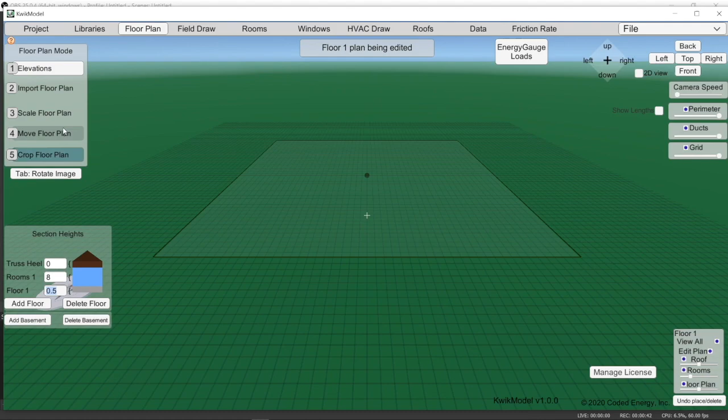So we go to floor plan mode here. The next thing we need to do is then import the floor plan. This one, top view, and then 2D, and then it looks like we need to rotate that. So let's see here. Tab rotates the plans. There we go. Okay, and so you see this is 58 feet across the back here.

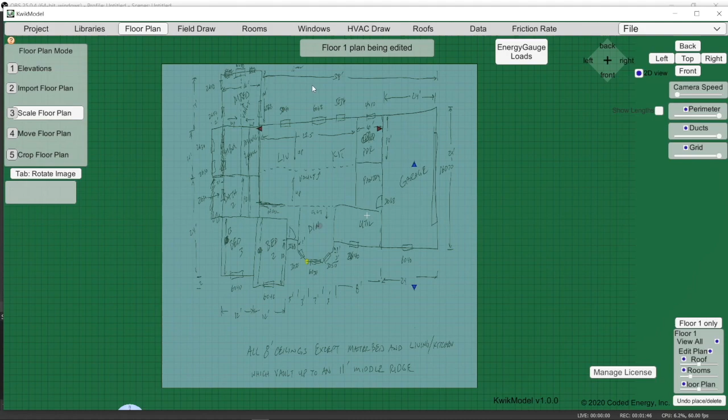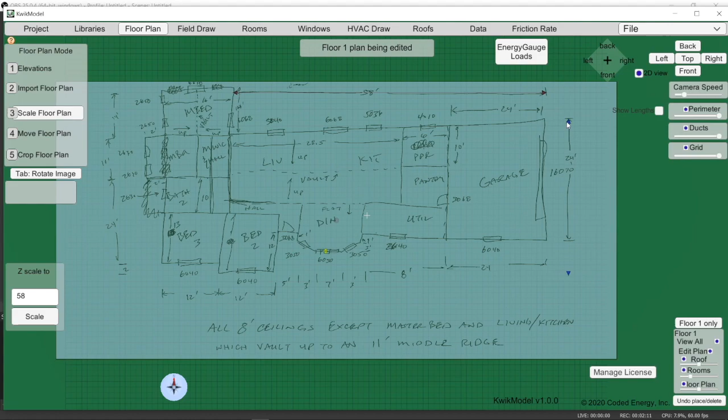So the bigger the distance, the better. But because this drawing is so out of scale, it's not super important, but you want to get it close. So we're just going to say that distance there is 58. We come down here and hit 58, enter, and then we want to do a vertical one. So grab your little blue arrows here, and here's a 24 feet over there, and call that 24. So I'm going to change this just a little bit, and maybe a little bit more. There we go. That looks a little better. Okay, so it'll be close enough.

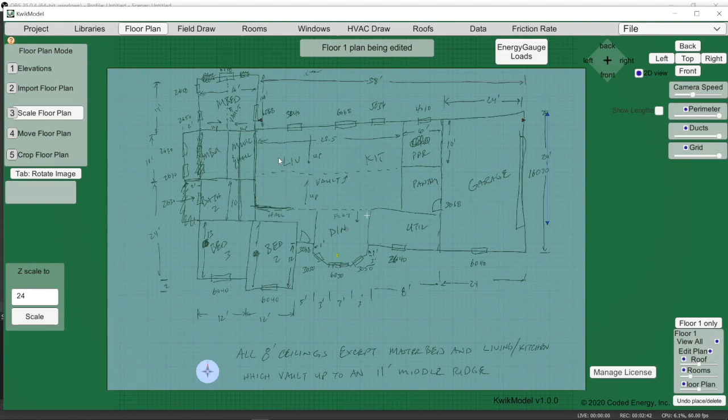Alright, so now we're going to go to Field Draw mode, and what you do in Field Draw is you basically identify the corners, and it will connect those corners with walls. So I usually start in the lower left hand corner of the house, and I hold down the Alt-Shift key and I click, and it puts a little dot there. Okay, now I'm going to go to the next corner, whether it's an interior corner like this one or an exterior corner like this one, and then I'm just going to walk around the house.

Okay, so here we go, Alt-Shift, and it draws everything square, so you need to compensate a little bit for that. Click, click. I'm just walking around. So this wall is really out of square, so I'm going to click over here and kind of square it up a little bit, and then I'm going to come down here, knowing that I have to come across to this corner. There's a little 1-foot wall there, and then a 45-degree wall, and then a straight wall, another 45-degree wall.

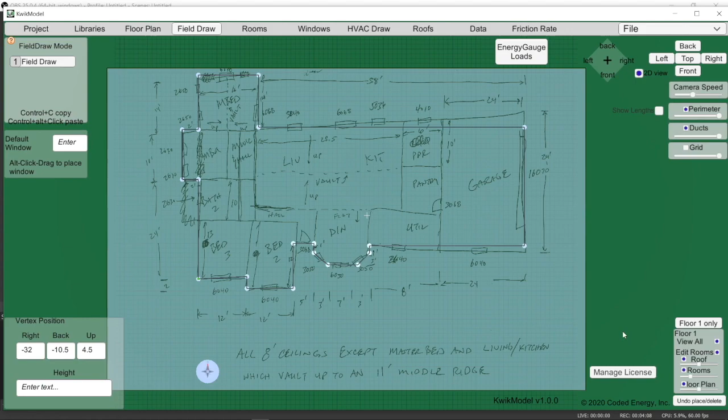And if it is not where you want it, you can just click on it and drag it over to where it needs to be, and then go back to Alt-Shift and just continue on around the house, and there we go. If I were to turn off the floor plan here, you can see that it created this perimeter.

Now what that's going to do is act like a cookie cutter, and it's going to constrain the rooms that we're going to place inside there.

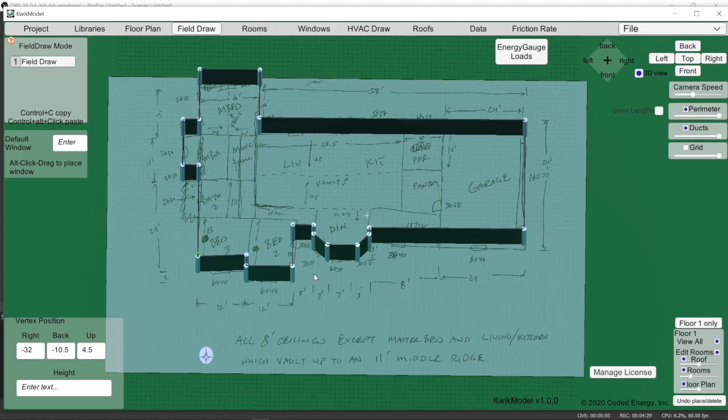But the first thing we need to do is get it to scale. We followed the drawing, and we know the drawing is not to scale, so we need to get it to scale. What we're going to do is use these dimensions on here. So this is 12, 12.

We got 24 across the back here, so we're going to go ahead and enter those lengths on these walls. If I click on this wall, and you have to be a little precise when you click on it, you'll see the way I've drawn it, it's actually 21 feet down here in the lower left, and I need to make that 24.

So I can go 24, enter. Now what it does is it shifts everything after. This was the point I started on. I should mention that too.

Whatever point you start on, the first wall you draw, that's the one you want to enter the length first, because it's going to adjust and move everything after that point based on the dimensions you enter. So everything afterward is going to adjust as you walk around the house and start putting this stuff in.

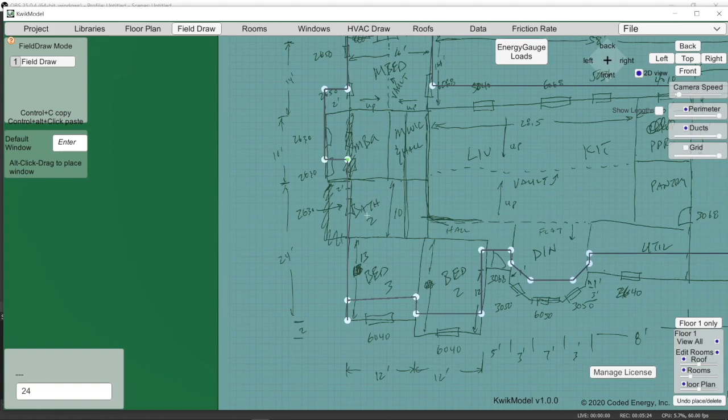Okay, and if you want, you can lighten the room a little bit so you can see the dots a little better. So from here to here is our first point, and it's 24, and now it's to scale. It's 24 feet wide.

So this distance here is 2 feet. Let's click on that, and the way it was drawn was 3.5, so that was a little long.

So now it's 2. And then this one here - by the way, if your scale drawing starts to deviate from your plans by too much, you can go back to floor plan and click on move floor plan, and you can readjust things to help you out.

So I see here that this looks like 10, but it's actually 11. Okay, so I click on here. Oh, I got to go back to field draw. Click on this one, and it was drawn at 10.5. It needs to be 11. Enter. Now it's good. This distance is 2.

Enter. There we go. This wall here is 14. There we go. And we've left our drawing just a little bit, so I'll bring it back just to make it a little closer.

This distance is 16. There we go. And this one is 14. Okay.

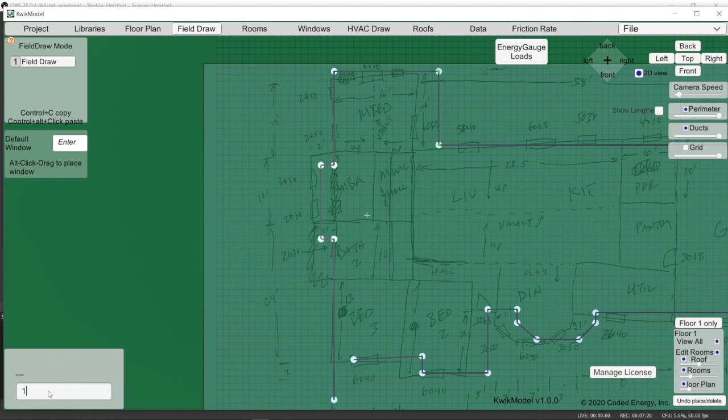Alright, let's adjust our floor plan a little bit here, get it back down. So now this was our 58. This long wall across the back was 58. So I'm going to click on that. And oh, we were close, 57.5, so 58. Enter.

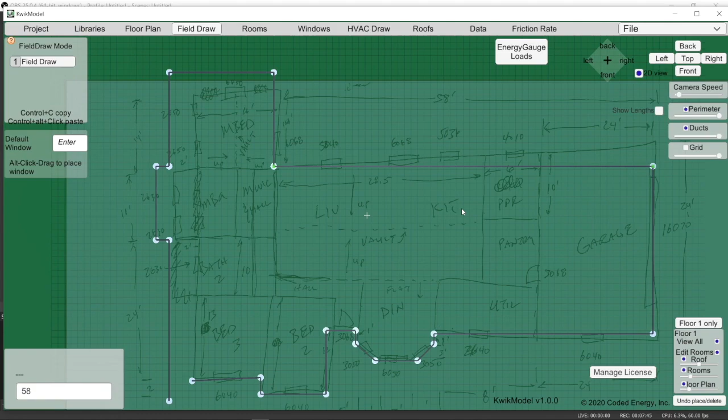Well, that was the one we scaled. That's why it was accurate, because we scaled based on that. 24 down here. Okay, 24. The garage is 24 and this utility room, but this wall here is going to be the sum of those two, so 32.

Okay, let's adjust our floor plan here. Now we got this tricky little bay window here. So this one is 1 foot.

These little bay windows, the best way to draw these is with your perpendicular distances. So you've got 3 foot this way and 3 foot this way, and you can sort of manually do that. I know if that corner's there, and I go 1, 2, 3 here, and then go over 3, 1, 2,

3, then that's a nice 45-degree angle there. Let's line this one up too, make everything nice and square. So this wall is 7.

Okay, and then we have the same thing here for the 3 foot by 3 foot. So if we go 1, 2, 3, that's good. 1, 2, 3, that looks pretty good. Okay, that one's 1 foot.

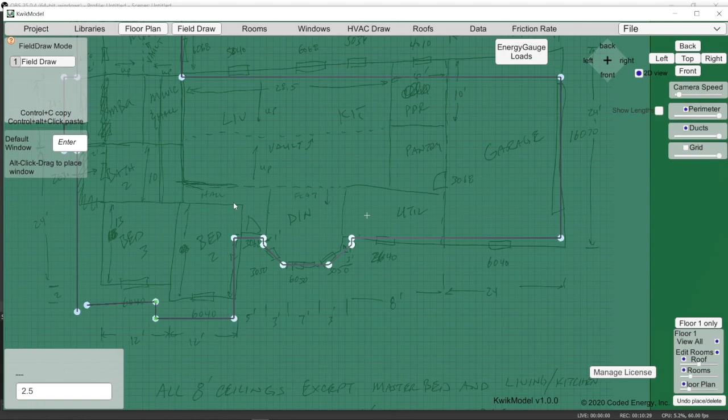This one is 12. This one is 2. That's this guy here. Let me scooch this over. So that's just 2 feet here.

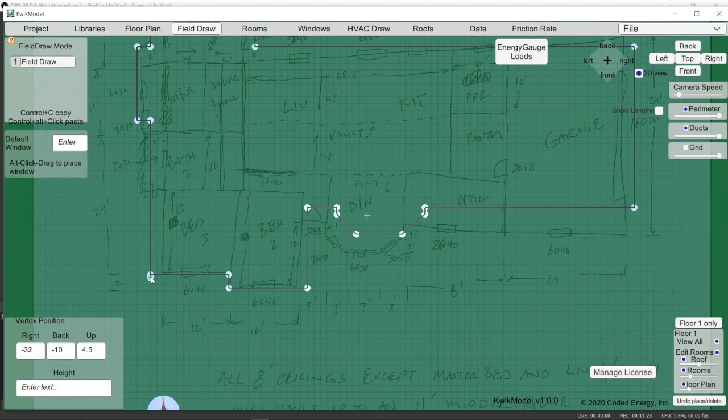Two, and then this one is 12, let's square it up a little bit this way. So 12. Now, if the dimensions were perfect, and we suspected they were not, this dot and this dot would land right back on each other. But considering all the dimensions around the house, they're only off by about a foot, so that's actually pretty good. So I'm just going to true it up by grabbing this one and putting it right on top of that other one, and there we go.

That's our true scaled perimeter of the house on top of a not horrible but not great hand sketched floor plan. Let me turn off the floor plan so you can see it a little better. If I go into 3D mode, you can see that's the perimeter of the house, and that's all to scale based on the dimensions they drew.

Okay, now the next thing we have to do is draw the rooms. The way you do the rooms, what this field draw does is draw this perimeter, and this over here turns it on and off. This perimeter constrains the room, so you can plop the rooms down inside of it, and they bump up against this wall, giving you a nice template to keep everything inside of.

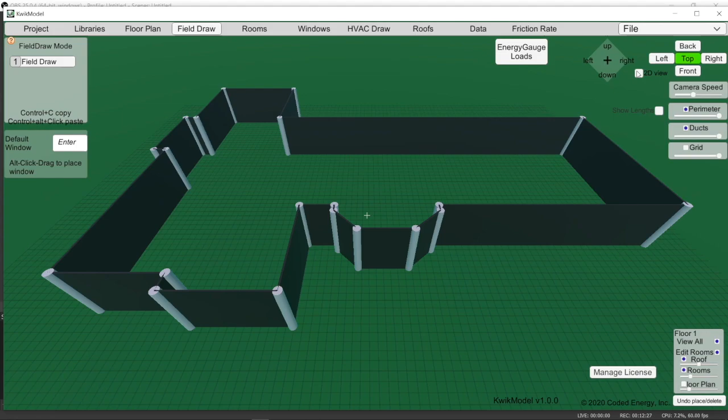So let's go back to top view and 2D mode, and the next thing we're going to do is go into room mode, and we're just going to alt-click to place a room. You can drag it and you'll see how it collides with that perimeter we placed there. It just bumps up against it, you can't go past it, and that makes things go a lot faster.

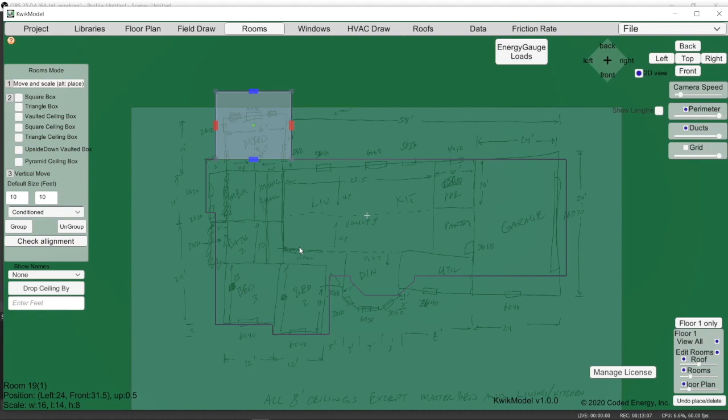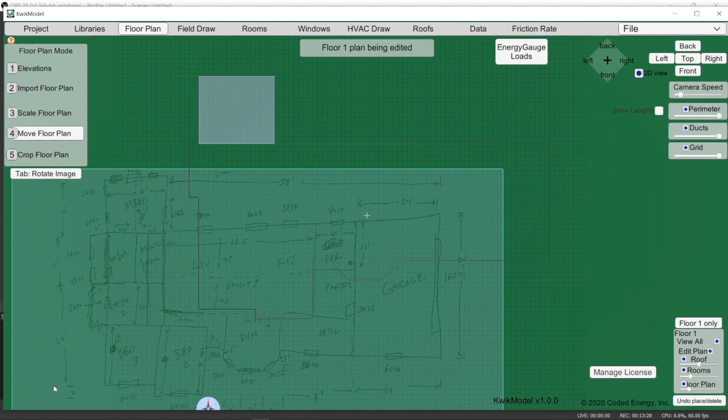So just drag it to the width this way, and let's turn our floor plan back on. Down here, floor plan. So you can see we're in the master bedroom, and the master bedroom is basically a square rectangle. The master bath is in this little bump out area here. If you want, you can move the floor plan off to the side where you can see it and do your rooms, or try to put them up on top. You can also lighten the rooms with this little slide bar here so they're not quite so dark, you can see through them. It changes the opacity.

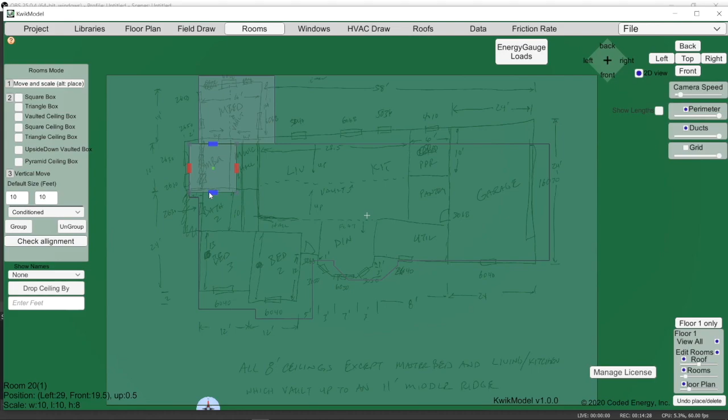Let's go to room mode, drop down another room, slide it in there, and it looks like I actually did - I said it was 10, and I think I may have typed in 11, because I noticed the default room size is 10 by 10, and when I put it in there it says 10 by 10 by 8. It's a little bigger, so I think I messed up on that, but it's easy to fix.

Just go back to field draw, click on that little corner. If you look real close, you can see a little green dot shows that it's highlighted. I'm just going to move it over, and then move this one over, and there we go, we're back in business. Go back to rooms, and we'll just put that master bath there, and then over here is the walk-in closet.

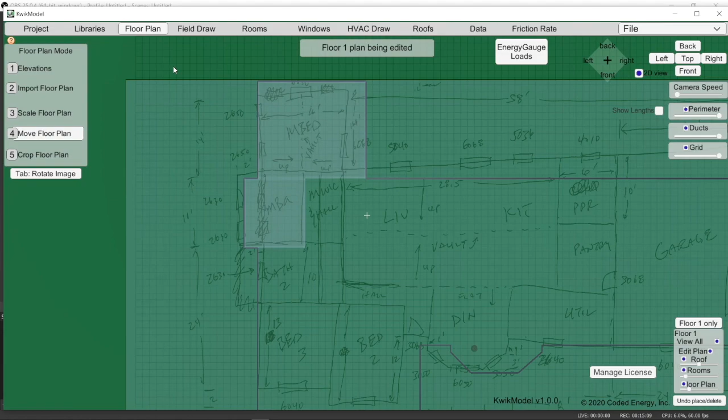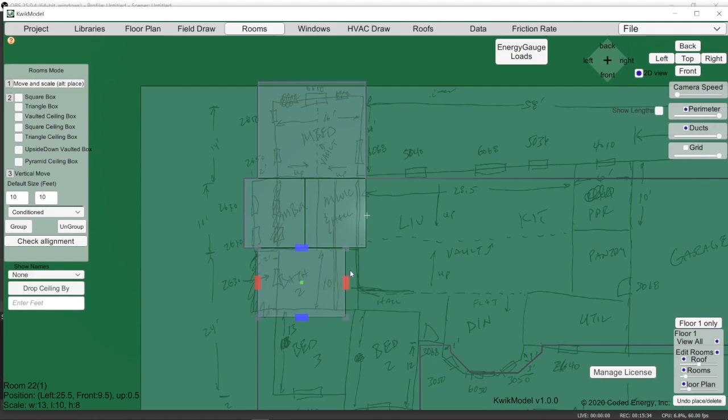Let's adjust the floor plan a little bit here, like so. Put a room here. Here's our bath. Okay, I'm looking at the line of our perimeter there, so it bumps up against there, and looks like the bath also includes the hallway. Okay, here's bed 3 down here. I'll line it up like so, so that's lined up there.

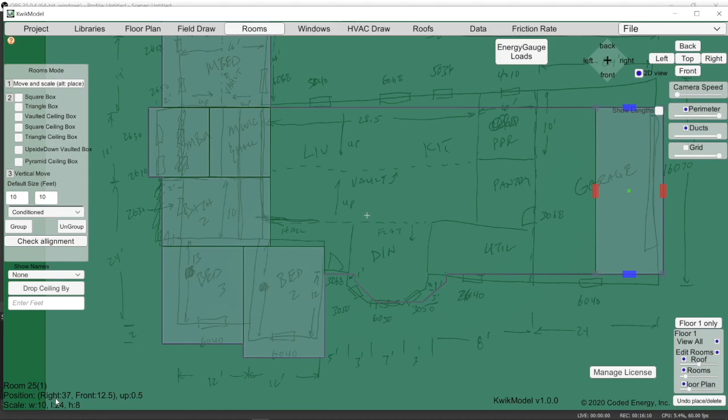Let's put bed 2. Okay, let's go ahead and put the garage in here. And the garage is 24, and if I look down here, it tells you the dimensions. So if I keep going, I look down on the left hand corner until it says 24, then I know I can stop right there. Okay, now that's 24 by 24. And while we're here, let's go ahead and designate the garage as unconditioned, so you see it's a slightly different color.

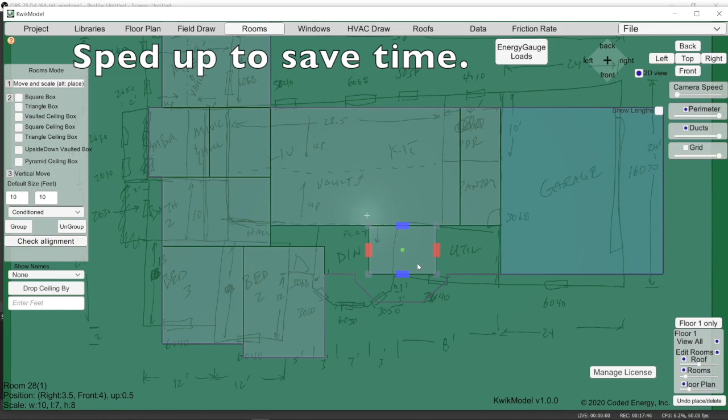Now let's see, we've got this big living room here. There's a powder and pantry, kind of a narrow powder and pantry. Okay, I'm going to go ahead and turn the floor plan off because it's a little distracting in the background, so you can see what we have here is this bay window like this.

And so what I'm going to do is fill it up with rectangles as much as I can. Okay, and I'm going to go ahead and turn off the perimeter for a second and put a little rectangle right in front. I just find that pink a little distracting sometimes. There we go.

Okay, now all we have left are these little triangles. So we have this thing called triangle box, which is exactly that. You select it, you hit tab until it's lined up at the angle you want it to be. I'm going to turn off the perimeter, get it to snuggle in there, and just bring these over like so. Let's do another one over here.

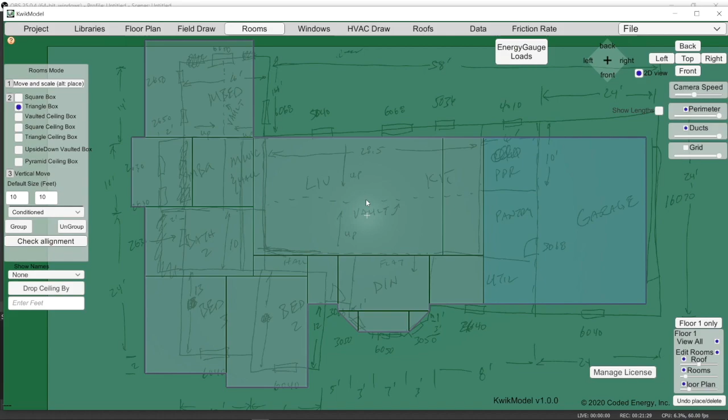Now, something we haven't done yet, let me turn the floor plan back on, is our vaulted ceilings. So there's a ridge running down here, and there's a ridge running down the middle of the master bedroom. So let's put those in.

The way we do vaulted ceilings, and it's best to be in 3D view for this, as you'll see here under rooms, vaulted ceiling box. So you alt click on top of a room and it puts this shape, sort of a wedge prism shape, and get it to line up on your room.

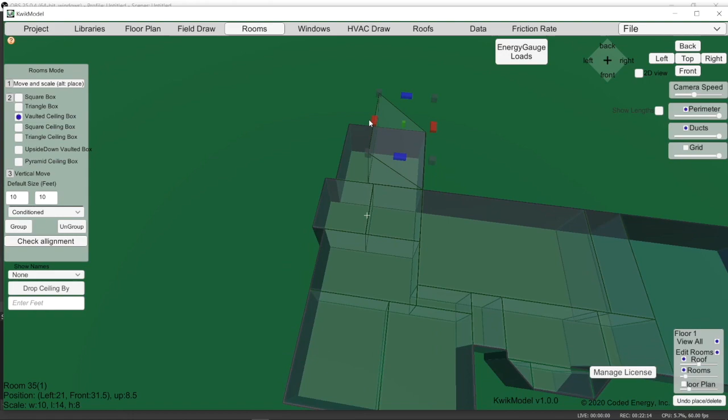Now this could be a single vaulted ceiling in one direction like so, or if, like in our case, we have a ridge running down the middle, we're going to need two of these. But let's get the height correct first. If you look down here, it says the height is 8.

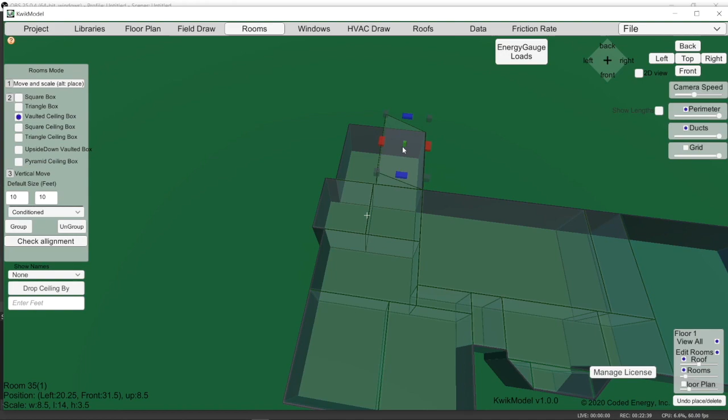So let's bring that down. If you recall, it's going to be 3 because it's 8-foot plate heights and an 11-foot ridge. So we get it down to 3 on the height, then 8 plus 3 is 11, and then we just need to put another one on this side.

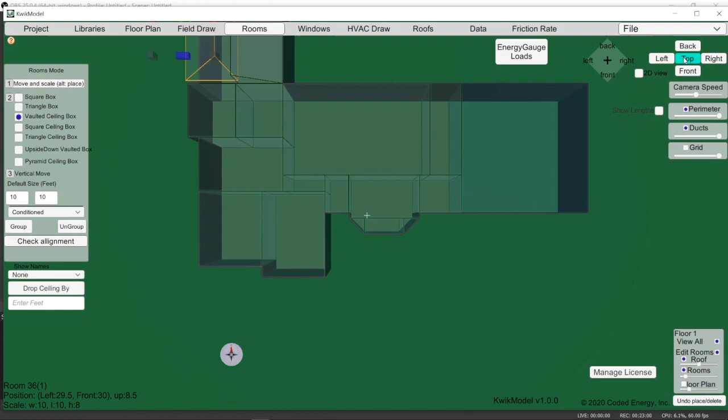Tab, tab. Get it to line up. You can go back to top view 2D if it helps. Sometimes it does. Also, you might remember that master bedroom was 16 feet wide, so we want...

This says 7.5, so this side's a little bigger. So let's bring this one over, and then bring this one over. Now they're both 8. Yep. Okay. And we need to drop this one down.

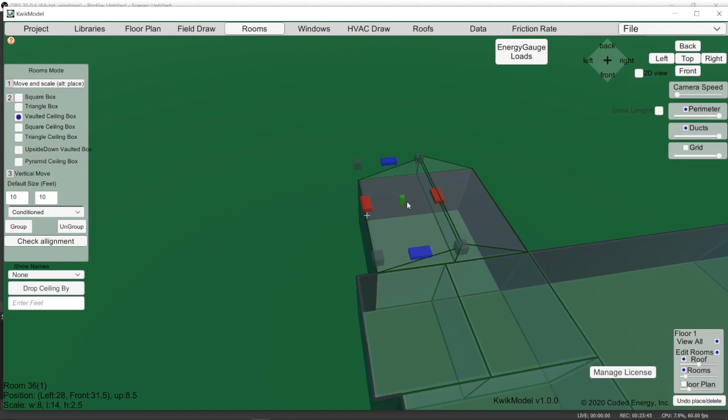You can just eyeball it once you've got one that's right. The green handle raises and lowers the height. Boom, there we go. And that looks pretty good.

Okay, now the same thing over the living and dining. I'm going to go ahead and go to top view, and okay, so I'm going to place a vaulted ceiling here, but I have to see what direction it's facing, so I need to turn it off center just a little bit, and that's the direction we want.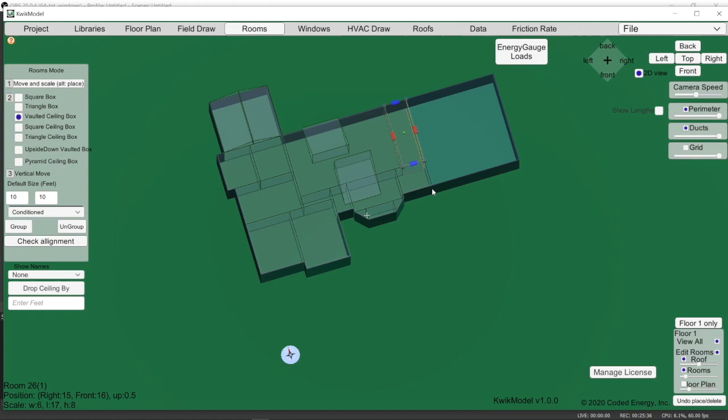And now I'm going to put the other one in here too while we're here. Get that one the right direction. Okay, so now I know that they're at least angled the right direction. Let's go back to top and 2D, line it up.

Okay, so you can tell by looking at it that this one's wider than this one down here, so let's adjust those. So now we got 8 foot, and which is it, length? Yep. So this one's still a little bit bigger. There we go, 8.5, 8.5.

So now they're the same size. Okay, let's go back to 3D, and let's drop them down to the right height. So we want to drop them down until they're 3 foot high. There we go. Oops, went too far on that other one. There we go, 3, 3.

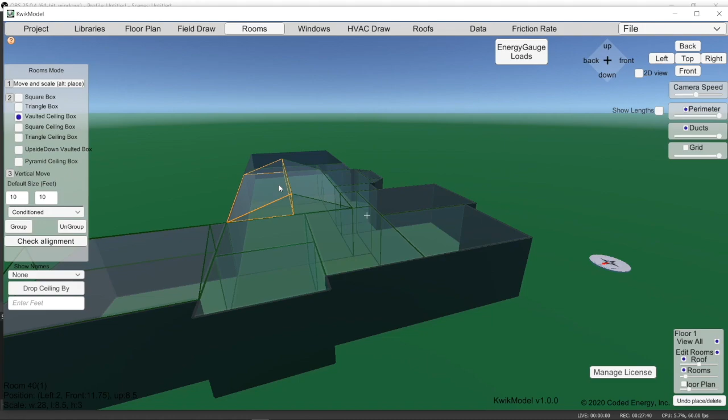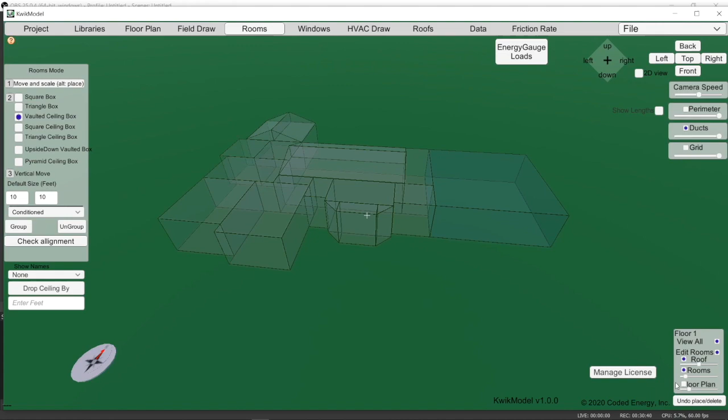Good. Okay, I'm going to turn off the perimeter, and there's our basic shell of our house. The last thing we have to do is put the windows on there, which means we got to open up that floor plan again. Alright, so let's turn the floor plan back on down here, and we'll see our windows, and we can drag the floor plan around to where we can see our window dimensions.

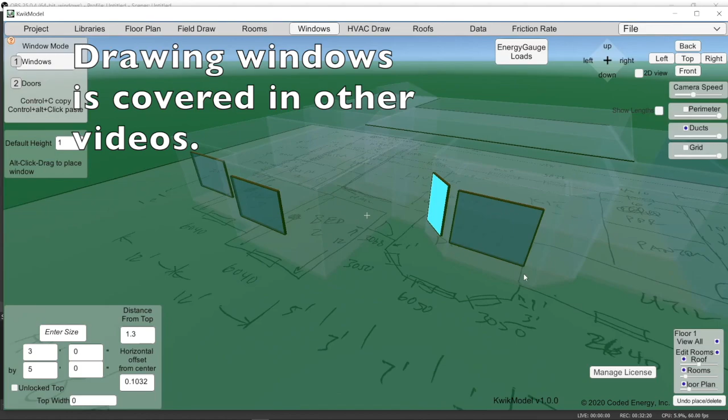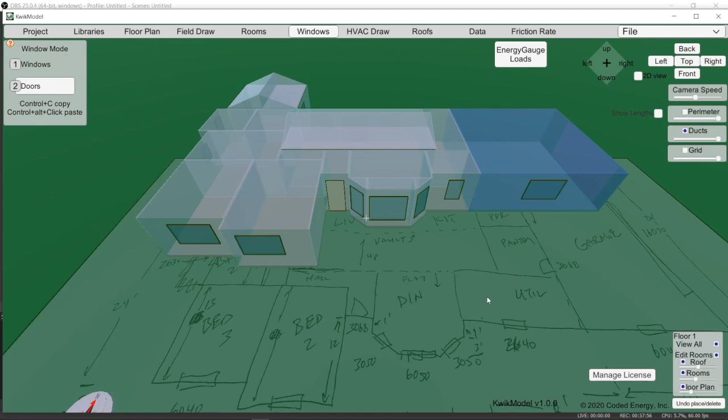Okay, so we have a window mode. Okay, turn off the floor plan, get rid of that floor plan, and there is your house.

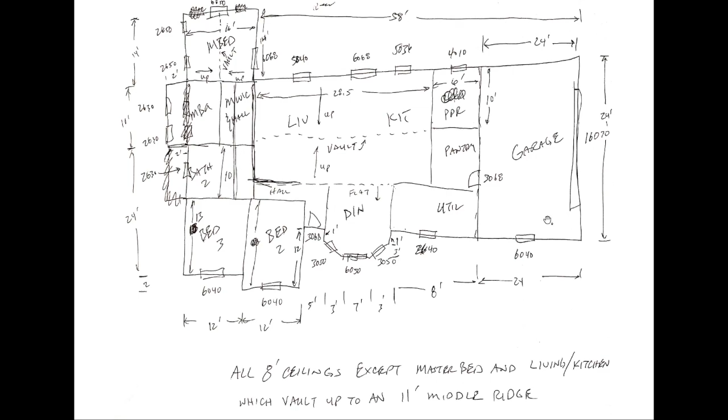3D model of the house. But the main purpose of this video was to take a very crude sketch of the house like this, that's good enough, not great, but good enough, and turn it into a 3D model like this that does all the area takeoffs.

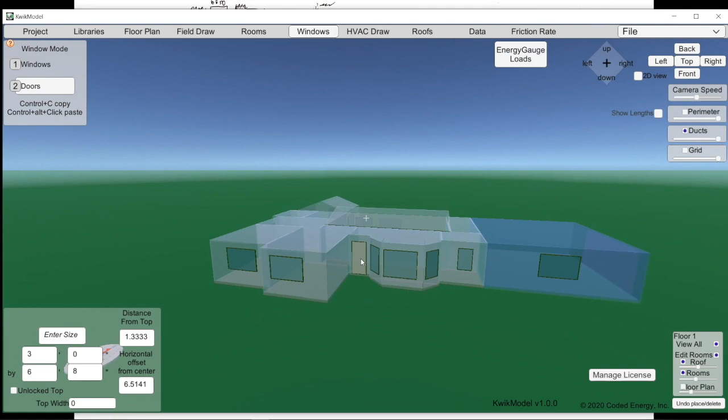And using KwikModel, you can do the manual J, S, and D, and EnergyGauge, and draw some really awesome 3D ducts. I hope you enjoy this, and I hope you'll check it out. Thanks very much.